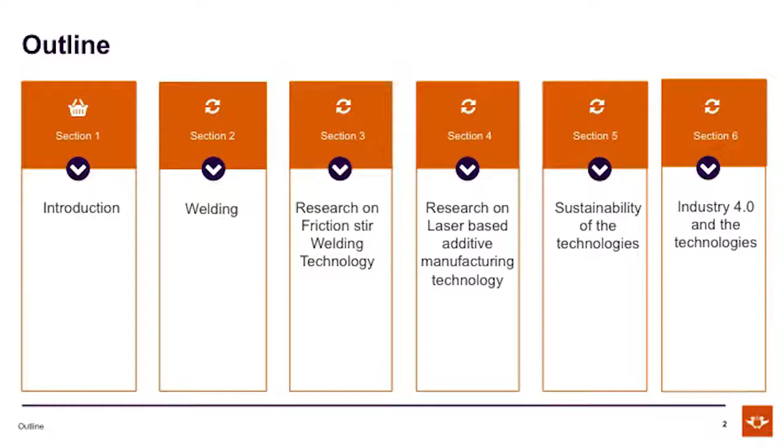This is the outline of my presentation. I will start with a brief introduction, give some fundamentals in the field of welding. I will go ahead and highlight some of my personal contributions to the field of friction stir welding in particular, and in the field of laser-based additive manufacturing.

I was just wondering, behind my computer when I was trying to put the slides together, when you received your invite and saw the title, Joining All About Life, what was going through your mind at that point in time. Did you agree with me, or did you not? Perhaps you strongly agreed, or you said no, joining cannot be all about life. Or you were just neutral and said, let me go hear what Esther has got to say about this topic she's put together for her inaugural address.

I'm hoping that after this address this evening, I will be able to convince you that indeed joining is all about life.

You will agree with me that scientifically, human life started with the fact that there was a joining. The sperm cell and the egg cell had to fuse together in a natural way. There was a joining that happened. And I'm standing before you today because a joining took place some years ago. I believe you agree with me.

Despite the advent of 3D technology, where we build component parts at one go, I still believe strongly that many of the components we use in our homes, even in this auditorium, the chair, the table, are all pieces of various components that were put together. You will agree with me that the majority of what we use daily has one element of joining or the other. I hope you're all following me on this journey, and I hope I'm already beginning to convince you that indeed joining is all about life.

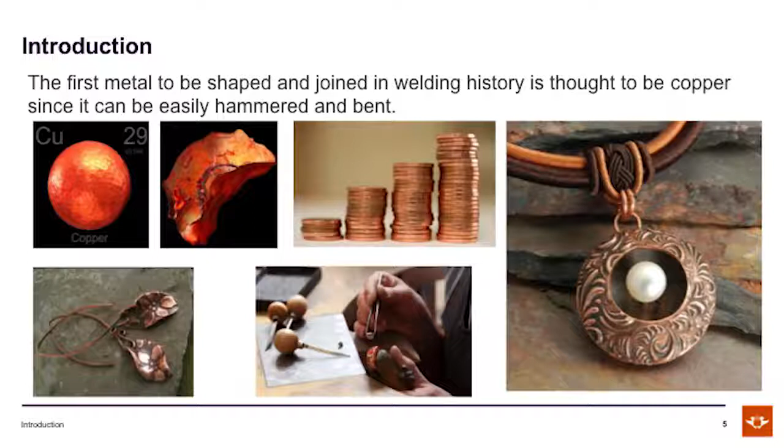The first metal recorded in literature to ever be joined in history happened to be copper. Since then, it's still being used and finds its application today. Copper has been used ever since in history and continues to be joined today because it is a material that is very malleable, easily hammered, and can be easily bent. It finds applications in jewelries, in coins, and many other applications.

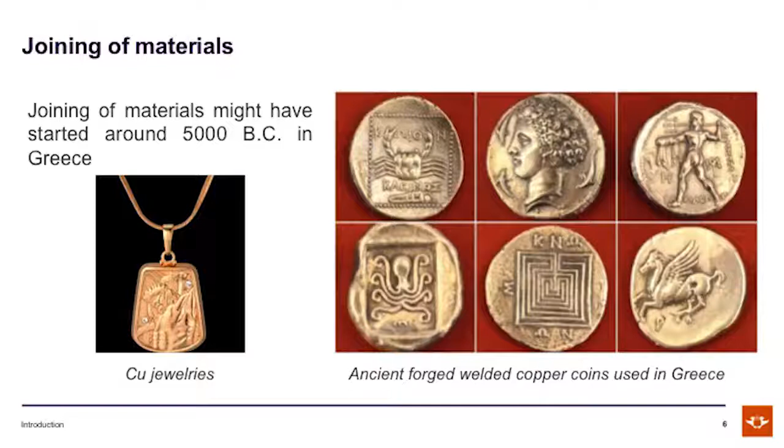The history of joining dates back to 5000 BC, and it was first recorded in literature in Greece. The Greek researchers at that time used copper to produce the coins that they spent in Greece, and they were the first to produce coins from copper. From there, the use of copper to produce coins expanded across the world, up until even here in South Africa.

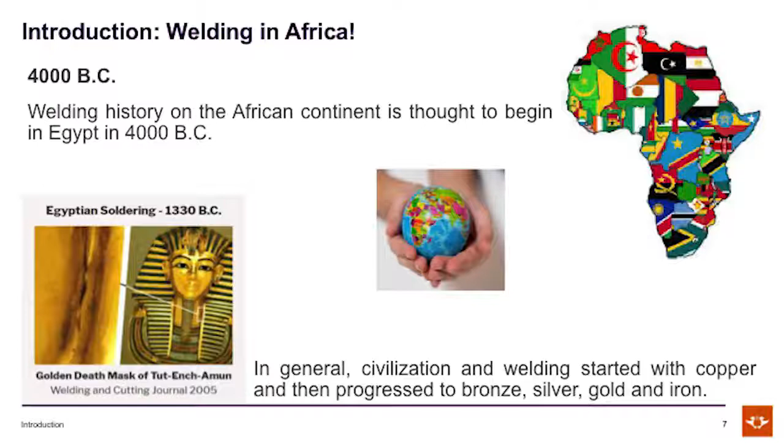For us in Africa, welding was believed to start about 4000 BC, also with copper, and that was recorded in Egypt. Not until 1330 BC, when the Golden Death Mask was produced by joining copper materials together as a funeral mask for King Pharaoh at that particular year.

In general, with civilization over time, the joining of materials then extended from only copper to several other materials. And even today, we also join plastics, not only metals.

Welding can be categorized into two major groups. One is fusion welding, wherein the materials have to be melted before they can be joined, usually with the use of an electrode. That is the welding technology that is very popular and that we all know about. The roadside welders, that is what you see them using their welding machines to do.

Further to that, some decades ago, we then have the solid-state welding technology, wherein the materials do not have to be melted. Technology then improved with solid-state welding because it has better properties compared to fusion welding technologies. And among the solid-state welding technologies, the latest happens to be friction stir welding. That is my own passion, and it happens to be the field I have worked on in the past 10 years of my career.

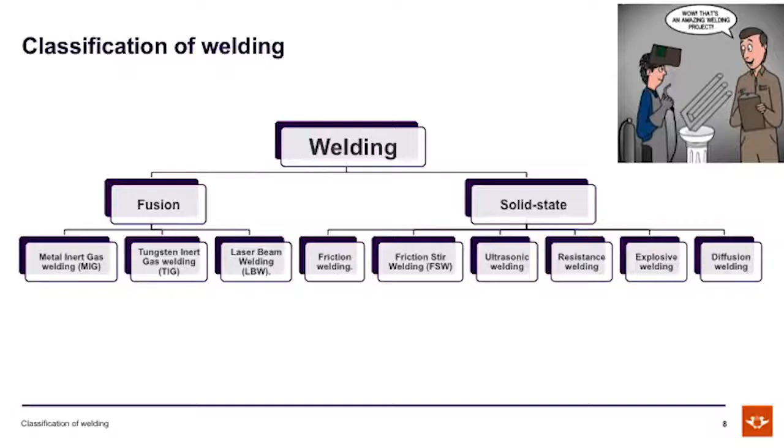Friction stir welding technology was invented in 1991 by Dr. Wayne Thomas, who was a welding engineer at the Welding Institute in the UK. The process is a continuous process wherein we plunge the welding tool through the machine into the abutting surfaces, we stir, and then we join two materials together, leaving behind a solid phase joint. The process is very suitable for all kinds of joints and all kinds of materials, and the welding temperature happens to be between 60 and 80% of the melting temperature of the base material.

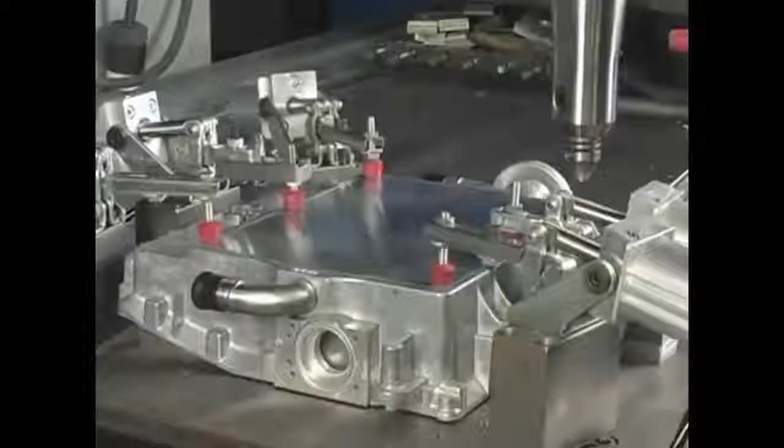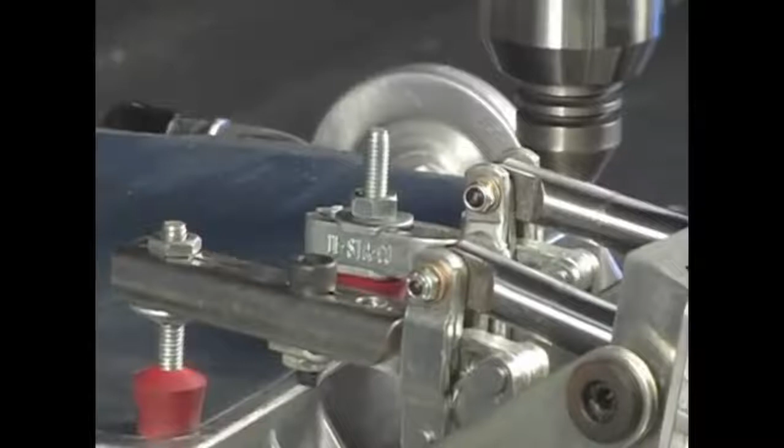I will now show you a very brief video of the friction stir welding process. Pieces to be joined are aligned in a friction stir welding machine, then clamped into a stationary position. When the rotating pin tool reaches a predetermined speed, it is axially plunged into the workpieces, creating frictional heat at the interface. As the material softens, the pin tool continues to move axially into the pieces, expelling flash material from the interface.

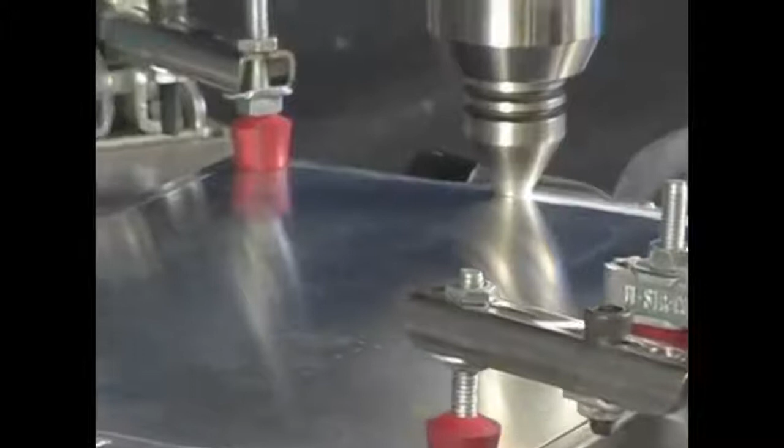Once the pin tool reaches the proper depth, the pin tool's shoulder contacts the material surfaces, generating frictional heat under the tool's shoulder. While maintaining part contact, the pin tool moves through the workpieces, softening the material along its path. The material is swept from the leading edge of the pin tool to the trailing portion, where it is reconsolidated into the weld trough. After the programmed weld path is complete, the pin tool is moved to a non-critical area of the workpiece, where it is then extracted from the part.

The technology comes with a lot of benefits compared to fusion welding technology. It comes with excellent joint properties. It's a green technology, and compared to fusion welding technology, there's no fume, no smoke that is produced, as you can see from the video just now. It's an environmentally friendly and energy efficient process.

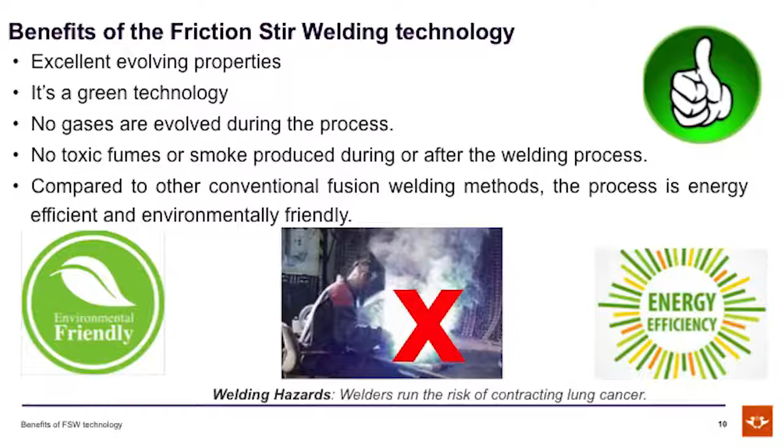The first friction stir welding application on a commercial basis was in 2004, when the US government gave a funding award of about $300 million to TWI to conduct research. The scope was to produce the Eclipse 500 business jet. Airplanes generally have a lot of riveted joints on the panels, so the assignment of these researchers was to remove riveted joints in panels of this plane and replace them with friction stir welding, because the researchers told the government they could reduce the weight of the aircraft, thereby saving energy. They were given this assignment, and the project was concluded in 2006.

Indeed, they had 60% savings on the weight and great improvement in the fuel efficiency of the 500 business jet. That was the first successful commercialization of the process.

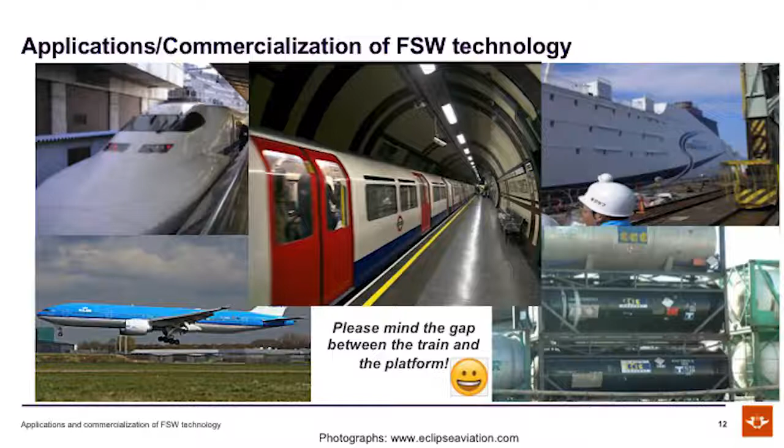The technology has since grown over time and has been greatly commercialized. One commercial application I'm going to leave with you this evening is the use of the process in the underground tubes in London. When next you visit London and step into the underground tube and hear, please mind the gap between the train and the platform, remember you're jumping into a train that has friction stir welds on its panels.

I hope you will do me that favor - you will not forget that particular point from this inaugural address. Other applications are found in shipbuilding, the petrochemical industry, and many other applications.

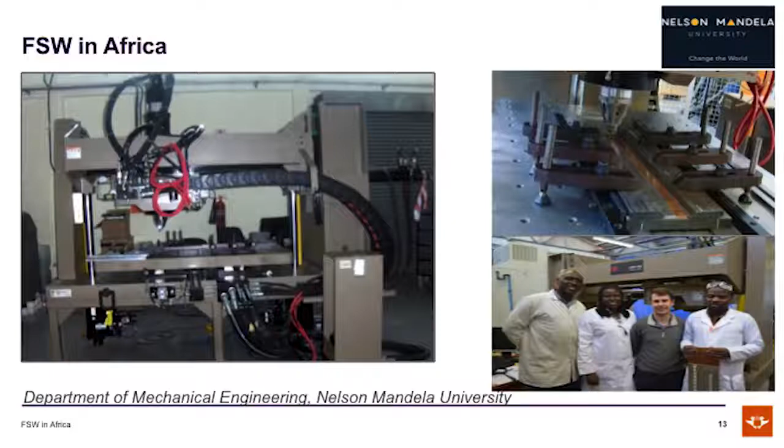Now coming to Africa - friction stir welding technology in Africa. The friction stir welding platform at the Nelson Mandela University happens to be the first friction stir welding platform on African soil, and I was privileged to be the first PhD candidate to work on this platform. So I can say that I am the first PhD in the field of friction stir welding in Africa.

Since graduation in 2011, I have continued to collaborate with my alma mater at Nelson Mandela University with Prof. Hattingh. From time to time, we visit the university with quite a number of my students, and this was one of the photos from one of our trips. I have Patrick here, who is now a postdoctoral fellow with me. This is the operator of the machine. Here you see Esther, and this man is my co-researcher in the field.

My personal contribution in the field of friction stir welding is in joining aluminum to copper. To date, there is no electrode that can join aluminum to copper, because of the huge difference in their melting temperatures - copper melts at 1085 degrees, while aluminum melts at 660 degrees centigrade. So research is still ongoing, but as of tonight, there is no electrode that can join aluminum to copper using fusion welding. This is my personal contribution: I was able to successfully join aluminum to copper using a friction stir welding process, and this work has been supported and sponsored by ESKOM.

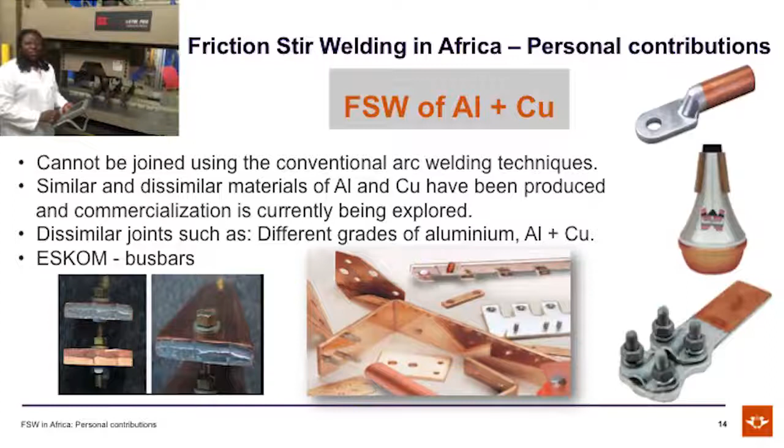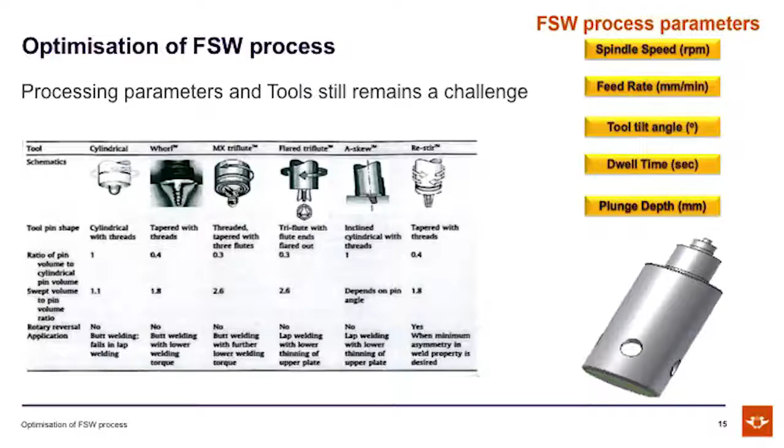The process is a very complex process, not as simple as going to the lab and doing one or two welds and being good to go. There's a substantial number of processing parameters that have to be optimized. The welding tool has to be optimized, and the tool material also has to be optimized. I was able to achieve this by using design of experiment to come up with welds with good integrity.

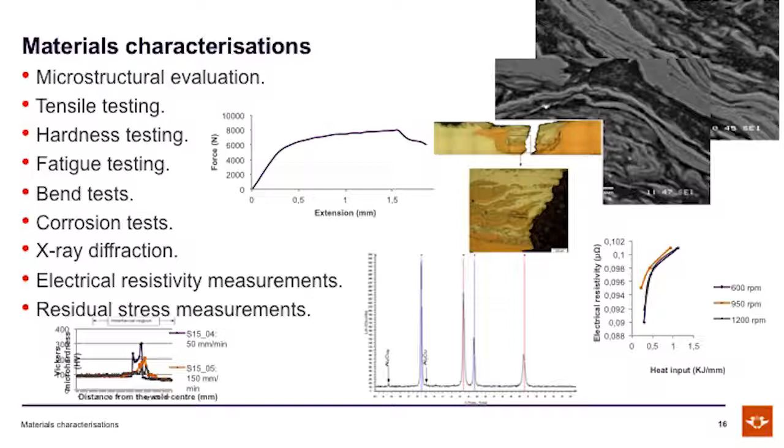When we conduct welds, we always want to ascertain the joint integrity. In doing so, we have to characterize the welds through materials characterization, mechanical property testing, corrosion test, X-ray diffraction, electrical resistivity, and residual stress characterizations, depending on the typical application the weld is intended for. These are some of the results for joining aluminum and copper.

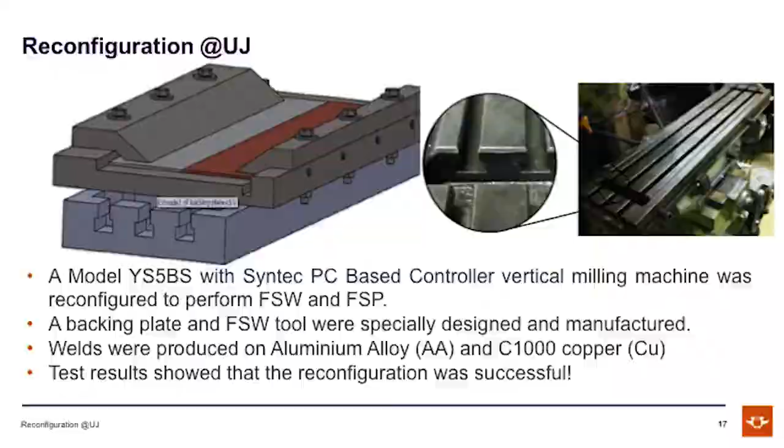Starting at UJ, we do not have a friction stir welding machine at UJ, and I needed to continue my research work. So what I did was get some students together in 2011. We designed the fixtures, the backing plates, the clamping fixtures, and the tools. Off we go - we reconfigured a milling machine at the Mechanical Engineering Science department here at UJ, and successful welds were conducted. Quite a number of students had their final year projects, and also some master students, use the reconfigured milling machine for about 2 to 3 years.

I then went further to Toolquip and Allied, a company here in Johannesburg that is into sales and maintenance of milling machines. They also opened their doors to us, and we had some time to work on their shop floor. They opened their showroom, and we successfully reconfigured quite a number of their milling machines to produce welds that particular year.

Here in the photo, I have Maleka, this is my humble self, and this is Willem and Clark. We were able to have quite a number of welds produced that particular year.

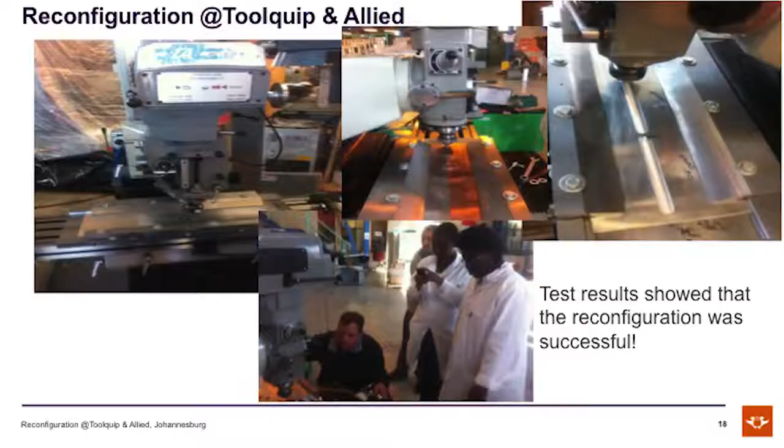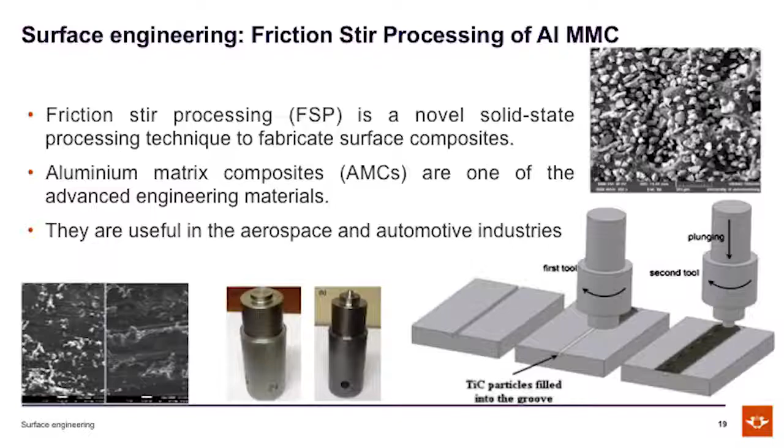Further to friction stir welding, I then moved ahead and conducted some work in surface engineering - improving surface properties of materials. In particular, I was looking at aluminum, on how to improve its properties. I conducted work on friction stir processing of aluminum by incorporating titanium carbide particles to improve the wear properties, and this was highly successful. Applications of these are found in the aerospace and automotive industry.

With this particular slide, this is the last slide reporting and highlighting my work in the field of friction stir welding. The next couple of slides will highlight the work I've been able to do in the field of laser-based additive manufacturing. In the field of friction stir welding and processing, to date I have successfully published over 80 papers in this particular field.

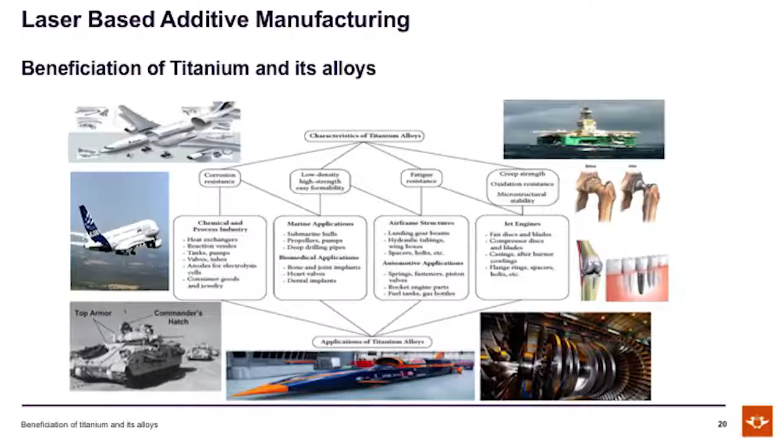Now on laser-based additive manufacturing. In response to the Department of Science and Technology and the National Research Foundation some years ago, there were calls for proposals for researchers who would like to work in the field of titanium and its alloys. I'm happy that I have Prof. Sisa in the room today, and Prof. Claudia Polese as well - they have been my collaborators over a number of years in this particular field.

The government identified the fact that South Africa as a country, we have titanium and its alloys in abundance, but this is in the ore form and has to be processed to be useful for end users. Titanium is a material with excellent properties, excellent corrosion properties, and has been extensively used in the aerospace industry, biomedical industry, and in the marine industry as well.

The laser additive manufacturing technology is very similar to the 3D printing that you are all familiar with. The only difference is that for 3D printing machines, component parts are printed from plastics, from ABS plastics. But for laser-based additive manufacturing, we produce component parts from metallic powders. The laser additive manufacturing, also referred to as LMD, laser metal deposition, uses the laser to generate a melt pool by melting the component surface, and the nozzle automatically delivers the powder.

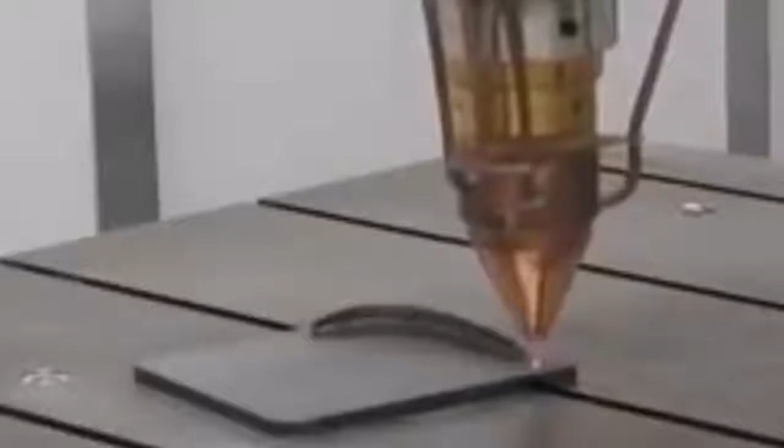This leaves behind a deposition. I will now show you another very brief video telling you about how the laser metal deposition works.

This particular video is showing how turbine blades are built. We always have a substrate, and we build on the material, usually to a near net shape. After the building, we are able to easily remove the component part that is built. As you can see, with the nozzle, it builds the material layer by layer until the full 3D component is formed.

Further work on laser-based additive manufacturing was a study conducted by one of my PhD students that I supervised to completion, Dr. Monnamme Tlotleng, in the field of cladding titanium with hydroxyapatite coating.

The background to this study is the fact that this is the titanium alloy grade 5 with aluminum and vanadium. It's been reported in the literature that over a certain number of years, 5 years and above, this aluminum and vanadium deionizes into the bloodstream, causing some diseases, particularly Alzheimer's disease. There was then a need to coat implants that are made from the titanium alloy grade 5.

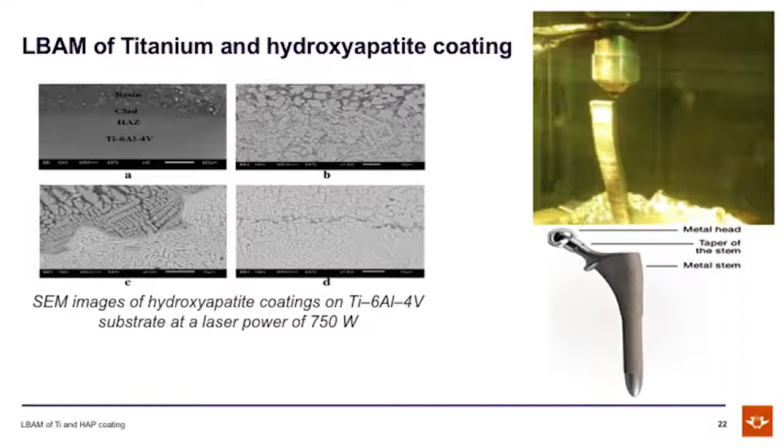We then used the hydroxyapatite coating. This is our own photo taken at the National Laser Center of an actual hip implant that was being built using the laser system. And these are some of the results showing good bonding and good results from that study.

Another study conducted in this field was cladding titanium with copper, also conducted by one of my PhD students, now a postdoctoral fellow, Dr. Foley Erinosho. This particular study is related to marine applications, in that we're trying to prevent biofouling.

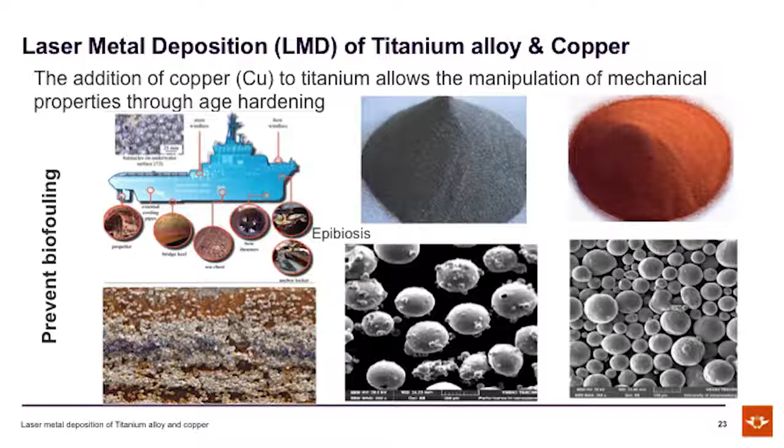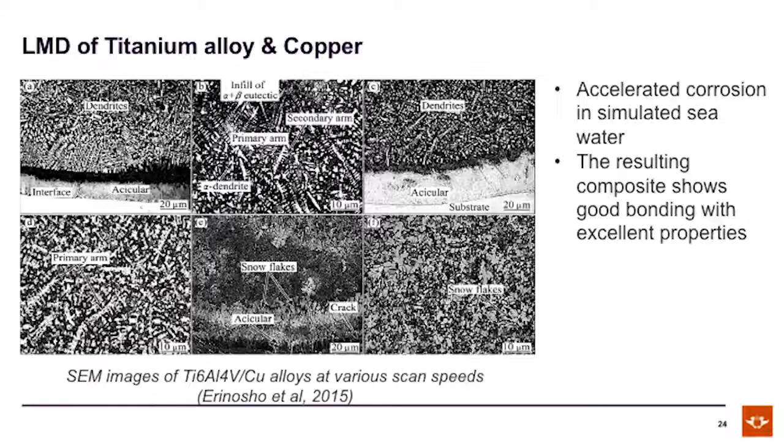Biofouling is when we have accumulation of microorganisms on the body of the ship in the water, also referred to as epibiosis. In this research, after cladding the titanium alloy grade 5 with copper, we observed that we had composites with good bonding and excellent properties. This was conducted using simulated sea water.

Still on this particular study of titanium alloy and copper, these two materials are also relevant in biomedical implants. The risk of copper deficiency is much higher than the risk of excess copper content in the body. Copper has been known to stimulate a warm flow of healing energy in the body.

When copper is deficient in the body, it's been reported that it can lead to health problems such as anemia, cardiovascular diseases, impaired brain function, obesity, and depression.

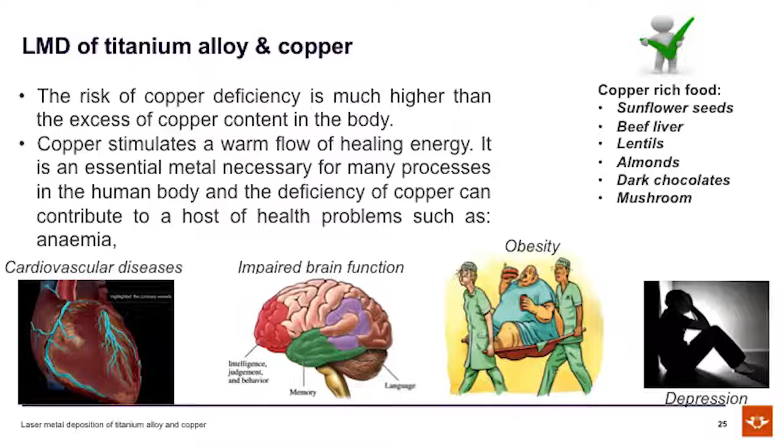On this slide, I have put some copper-rich food here as a take-home for everyone here today. When you see this food when you do your groceries, and you come across these food items, please pick them from time to time, because they will help you so that you will not have copper deficiency in your body system. That is sunflower seeds, beef liver, lentils, almonds, dark chocolates.

I know the children were very happy about that. And mushroom. Perhaps you're wondering, is this a health science talk? No, it is still in the field of material science and mechanical engineering.

Further work on laser-based additive manufacturing is the work that I have conducted in the field of functionally graded materials, popularly referred to as FGM. FGM started in Japan about three decades ago, where researchers observed that when laminate composites are used at high operating temperatures, the material tends to delaminate at the joint interface. They needed to come up with a material that is functionally graded in order to eliminate the joint interface.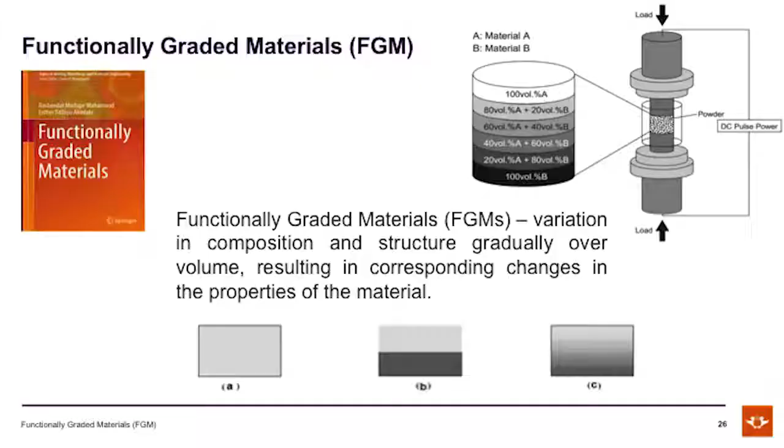In so doing, they came up with a material made by varying the composition and structure over the volume, similar to what I have in this particular picture. On this note, myself and one of my postdocs were able to publish a book, and that is the cover page of the book here, on functionally graded materials. So please, after this lecture, look out for the book and purchase your copy tomorrow.

FGM occurs in nature, naturally. In the human femur, we have materials in the body that are FGM. The human teeth has also been reported as an FGM. It comprises of calcium and hydroxyapatite, HAP.

Last year, we also had a discovery when one of my PhD students was working on bamboo in the lab, and he invited me. He said, 'Can you please join me? I'm seeing something, I'm not so sure what I'm seeing.' I joined him in the lab, and he said, 'What kind of structure is this?' I said, 'You know what, Richard, what we have here is an FGM.' He said, 'What does that mean?' And I explained to him. This was a discovery that the cellulose of bamboo is actually an FGM.

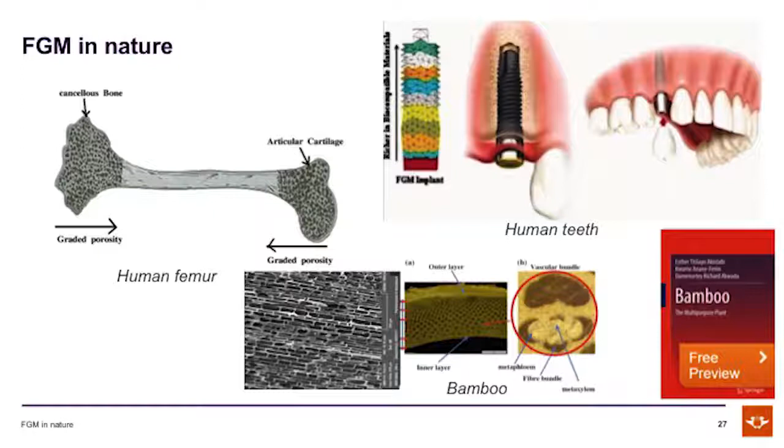As you can see, these are bamboo, the cellulose of bamboo. We then went ahead to write a book, and we titled it Bamboo. After this lecture tomorrow, please look out for that book on the internet, published by Springer, on bamboo, so that you can know more about what we have done.

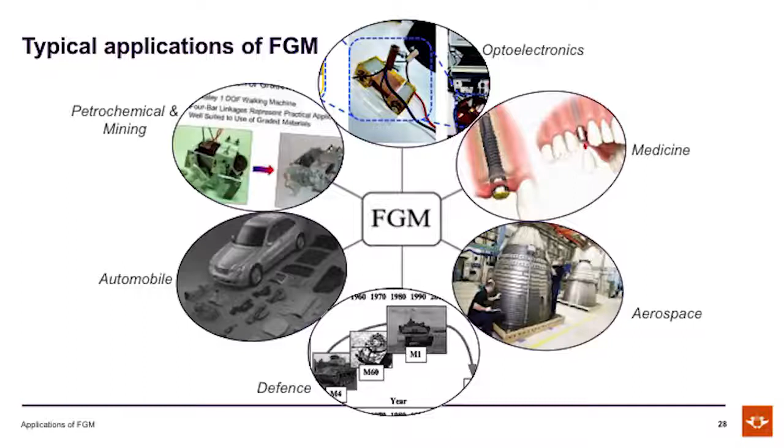Typical applications of FGM are found in petrochemical and the mining industry, automobile, defense, aerospace, medicine, and in optoelectronics. And the technology is growing and really, really evolving to solve a lot of problems today.

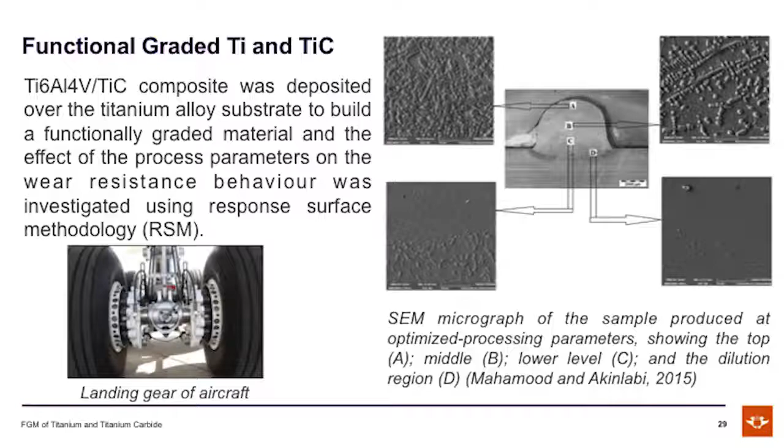In this particular field, I have further conducted some research work on FGM by functionally grading titanium and titanium carbide. In this work, we're trying to improve the wear properties of titanium alloy grade 5. Titanium alloy grade 5, though it has excellent corrosion resistance behavior, has poor wear resistance, where it involves two components rubbing on each other.

In this particular study, what we're trying to do was to replace the tungsten that is used in producing landing gear of aircraft, so as to reduce the weight of the aircraft. I have been to Denel Aviation to present this work with them, and talks are ongoing. We've had successful results from this work as well.

Also, I have conducted functionally graded materials into stainless steel. Stainless steel is still very relevant today. It finds applications in household utensils, cutlery that we use on a daily basis, cooking pots, and biomedical implants, and also in the petrochemical industry, because it has an excellent corrosion resistant property.

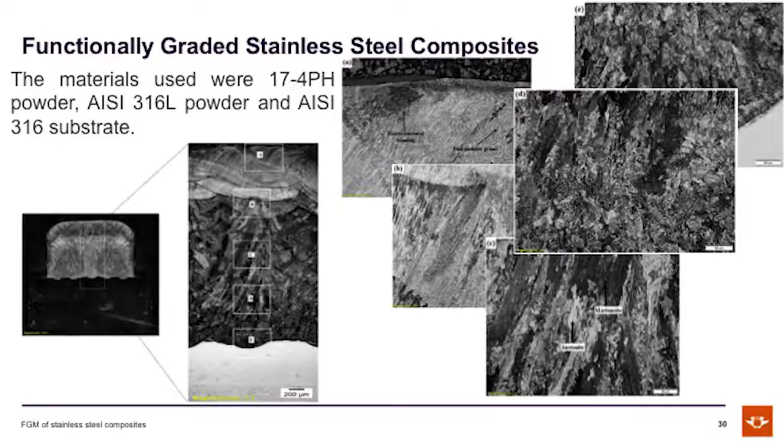In this particular deposition, if you look at this cross section, you will observe that from A to E, the materials have been functionally graded, wherein we have introduced various percentage volumes of 316 into 17-4PH. Looking at these pictures, C, D, E were taken at different levels of the material. Yet you will observe that they all look very similar, whereas the compositions are very different from one another. When we observe this type of outcome, we say the material has experienced an epitaxial growth.

And this has been a successful work as well. This particular slide then ends my work in the field of laser-based additive manufacturing. And I will now move on to talk about this particular slide.

With the strategic direction of the University of Johannesburg on the Fourth Industrial Revolution, I believe my address will be incomplete if I do not talk about the Fourth Industrial Revolution. I don't want Prof. Marwala to stop from giving my gown this evening.

So in doing this, I did an assessment of these two technologies I've been working on in the last 10 years. I related the Fourth Industrial Revolution to friction stir welding and to laser-based additive manufacturing, and I realized that the two technologies are compliant. Prof. Marwala, thank you very much for that direction of the university in the Fourth Industrial Revolution. So on this note, I can convincingly say that the two technologies are both fully automated. They are very flexible in operation, they operate at high speed, high accuracy, and are easily repeatable.

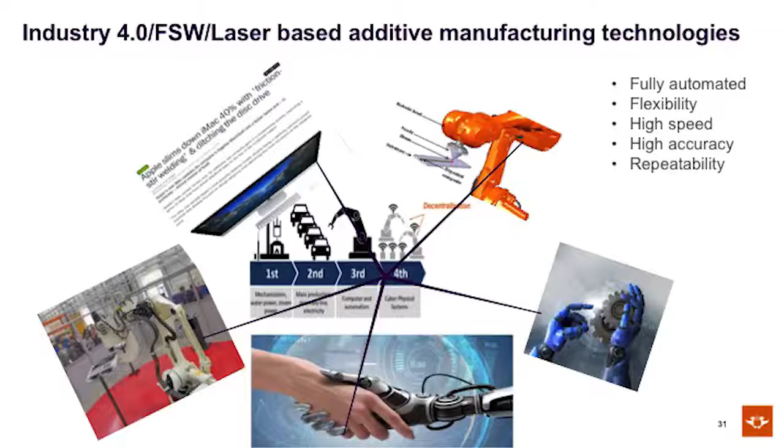I also want to share something with you here. Perhaps you're looking at this screen and wondering what it's doing here. Other pictures are very clear, but this one I want to show you: Apple slimmed down the iMac 40% with friction stir welding. If you have an iMac at home or in your office, friction stir welding technology has been used to produce the frame of the iMac, and the weight has been reduced by 40%. This has been used since 2012 till date, and they are still using it up until now.

So the two technologies, I can confidently say, are compliant with Industry 4.0.

Further to that, I also looked at the sustainability of the technologies. I realized that both technologies are energy efficient, with efficient cooling systems. They can be considered green technologies that save cost in the long run. On life cycle impact assessment, both technologies have a low environmental impact index, low impact on human health, and improved ecosystem quality.

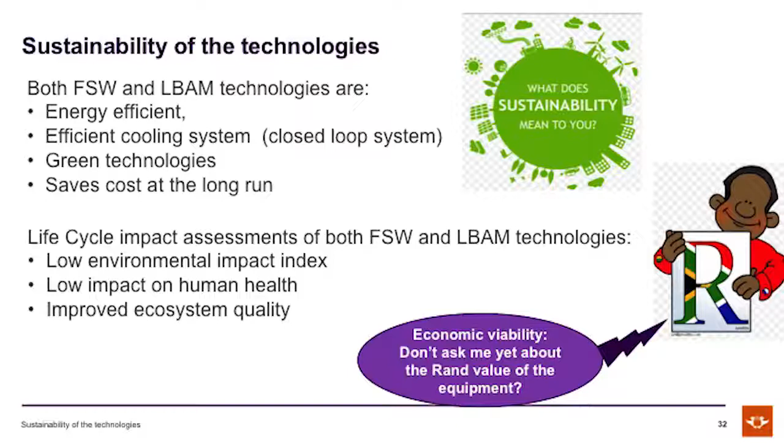Look at this gentleman here, that is Esther, flagging the rand equivalent there. For economic viability, don't ask me yet about the rand value of the equipment. The rand value for friction stir welding, last time I checked, is going for about 15 million rand. And the rand value for a complete laser system to produce laser-based additive manufacturing products is over 100 million rand.

So I'm going somewhere with this economic viability.

Other research interests I'm also into is biogas generation from fruit and vegetable waste. Perhaps after this lecture, if you collect up to 10 kg of waste in your kitchen, please call on me and I'll come and collect it, and I'll give you gas in exchange for your waste. So please take note of that as a take home from this lecture.

A lot of work is also being done in bamboo reinforcement, which has also been very successful.

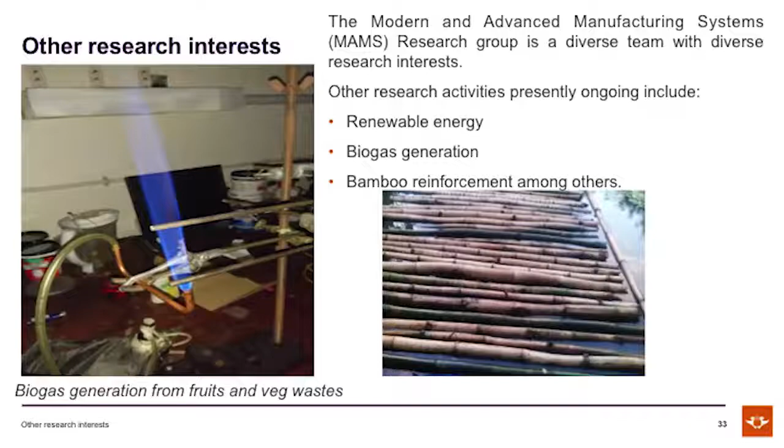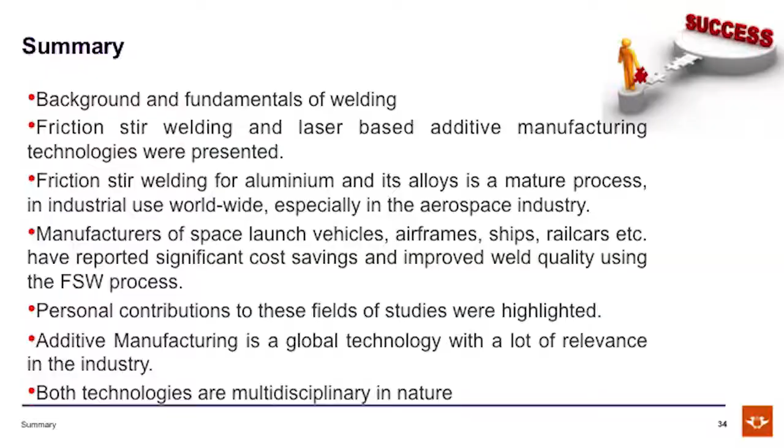In summary, I have provided a background and fundamentals into welding, and I have given highlights of my personal contributions in the field of friction stir welding and the field of laser-based additive manufacturing. Both technologies can be considered as being global, highly competitive, and relevant in industry. Both can also be considered as multidisciplinary in nature.

Having worked in these fields for the last 10 years, I've had the opportunity to work with many other researchers in various fields of expertise. I've had to work with physicists, chemists, materials scientists, civil engineers, mechanical engineers, and so many other people in diverse fields.

Some were wondering, perhaps, maybe after this inaugural now, at least she can rest a little bit. Perhaps. I'm not resting. I have a focus. I have a future direction.

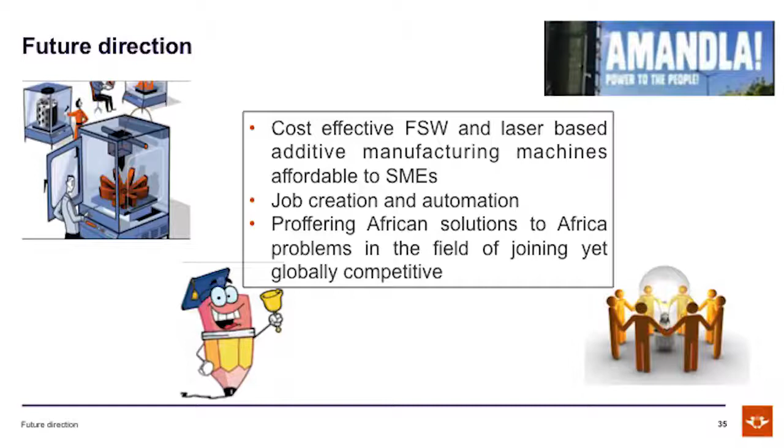And what I'm saying is, Amandla - that is power to the people. Awethu. So, Amandla.

Going forward, as a researcher, my plan is to collaborate with other researchers in this field of expertise and come up with cost-effective friction stir welding and laser-based additive manufacturing machines that will be affordable to small and medium enterprises. I believe this will lead to job creation and automation. In doing so, I will continue to contribute in this field by proffering African solutions to African problems in the field of joining, yet globally competitive.